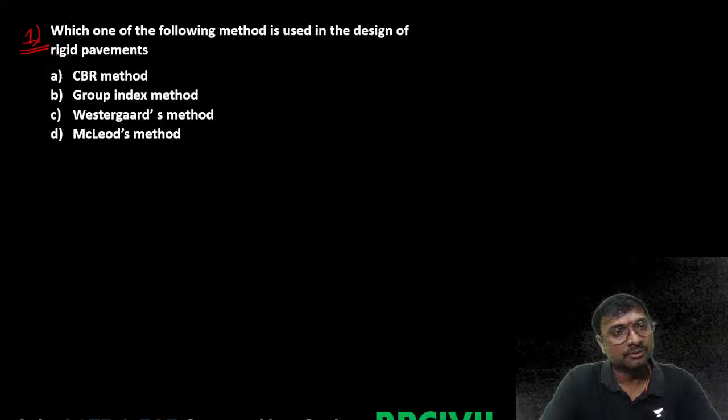Transportation engineering part 1. Select the answer for this, everyone. First question, write your answer. I did not give the timer actually — timer should be incorporated. Okay, let it be, from tomorrow's class onwards I will be incorporating the timer, don't worry. But here, what you do, you just write your answer, everyone.

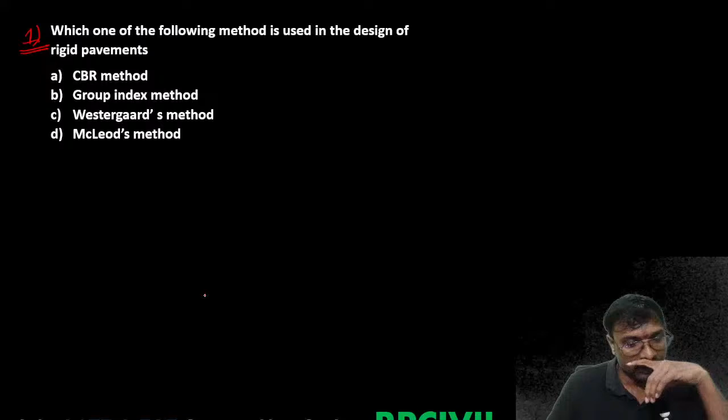Write your answer, everyone. Anyone? Yeah, Jagrati, good morning. Any answer by anyone for this? Somebody?

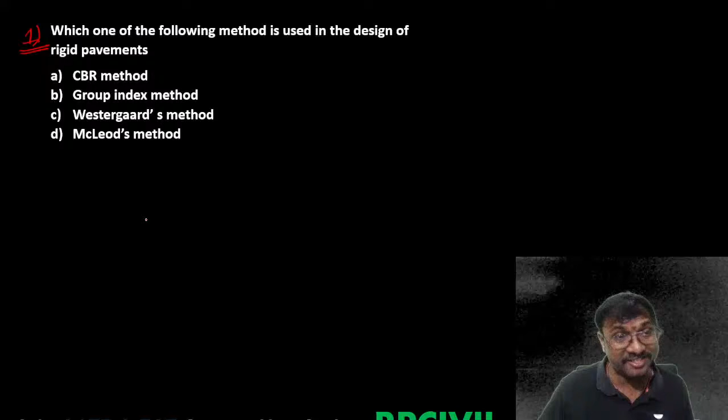Jagrati said B - group index method. Rigid pavements, you have to be careful. So which of the following methods is useful in the design of which one - this is a rigid pavement, right, used in the design of rigid pavement? So which method? CBR method is useful for the design of flexible pavement. Group index is also for the design of flexible pavement.

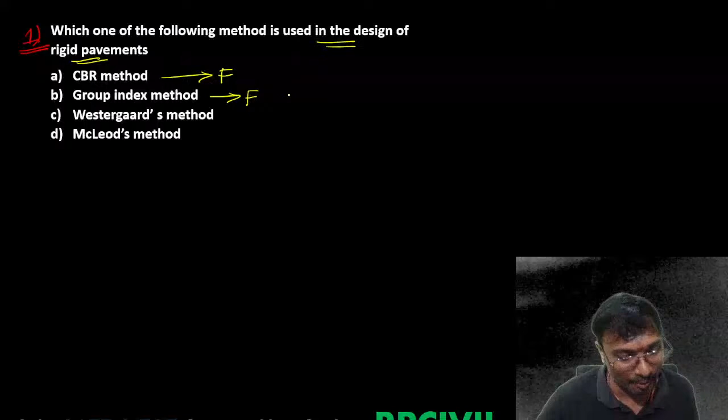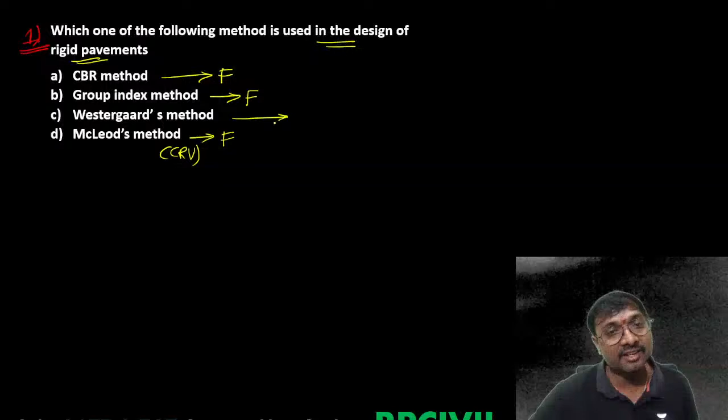Yeah, Abjal, very good morning. Option D, we'll check it. McLeod method, or this is CRV method - California resistance value method - this is also that flexible pavement method. Westergaard's method is only that rigid pavement method, yes or no? Westergaard's equations will be there, do you remember that? Westergaard's equations, Westergaard's coefficients, right, yes or no?

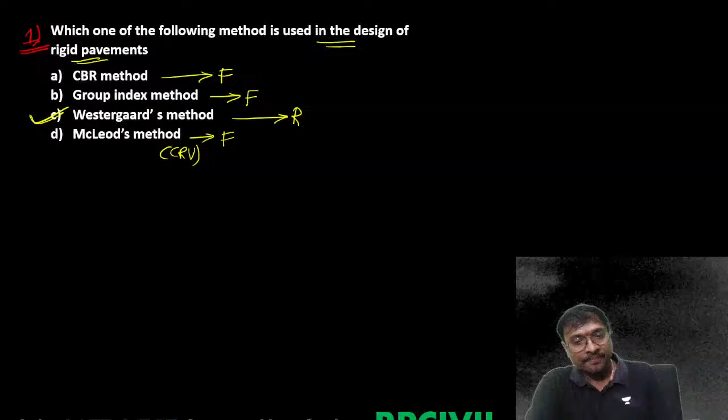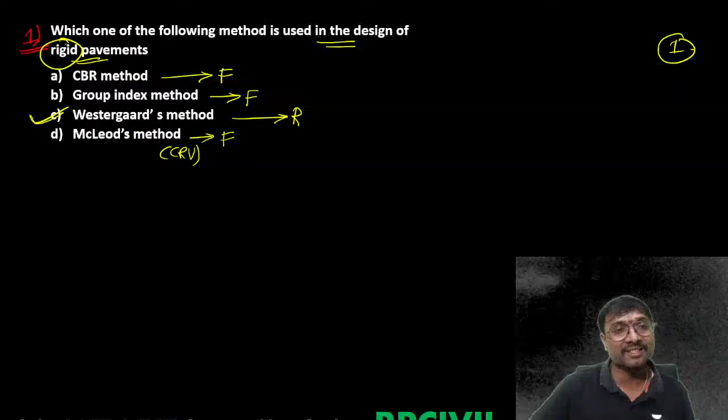See, Westergaard's equations, have you studied them or not? Yes or no, do you remember everyone? Load stress at the corner, interior, and all these portions - these Westergaard stresses, have you studied them or not? IRC stresses are modified, so which one is correct? For the rigid pavement, it is Westergaard's only correct now - for rigid pavement, Westergaard is only correct, you can say. Clear? Now select the answer, write the answer for the second question.

Write the question number and write the answer, because there is a delay or a little lag will be there. So write the question number and answer. Okay.

C, Hamid and Afjal said C. Any other answer by others? Jagriti also said C.

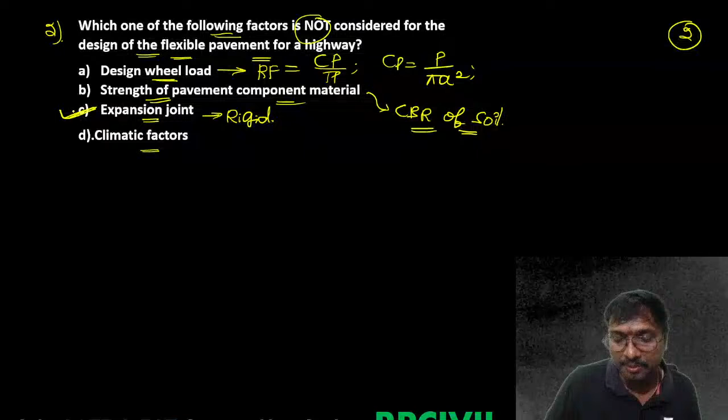Is that clear, everyone? Got it? Shall I move on to the next question?

So this is your question number 3, you can say, right? Question number 3, try to answer all of you.

Solve this, anyone? Anybody?

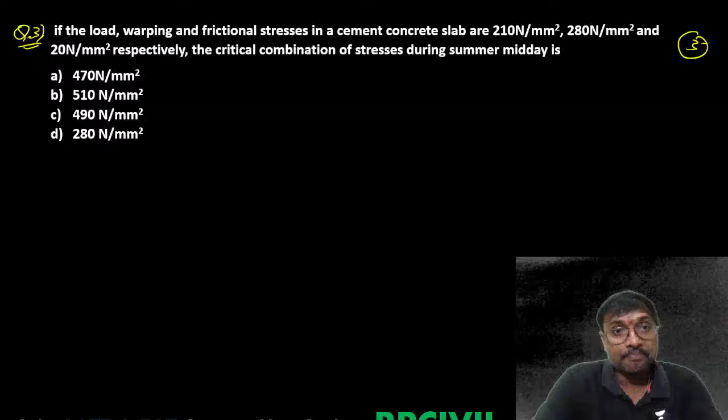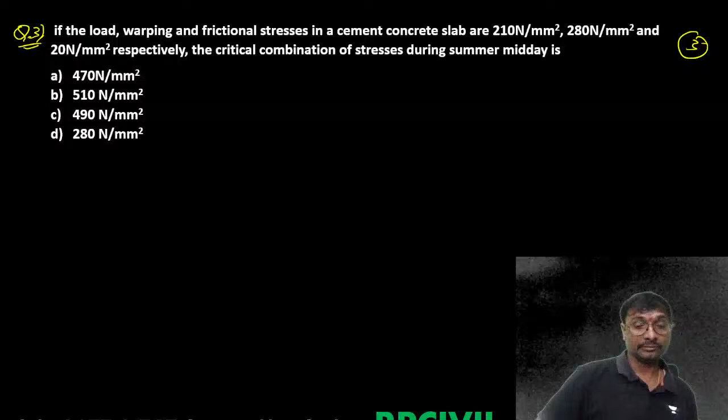Write the question number and answer so that I will not be confused about which question you are answering. Yes, na?

I should have given a timer, okay, but I could not incorporate the timer. I forgot actually.

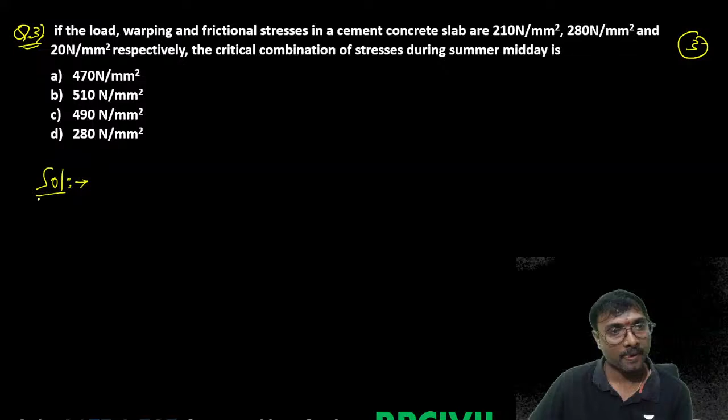Jagrathi answered yeah. Any other answer by others? Others also try and give. Amit said C. Next, anyone? Afjal, Alok. What is your answer? What are your answers?

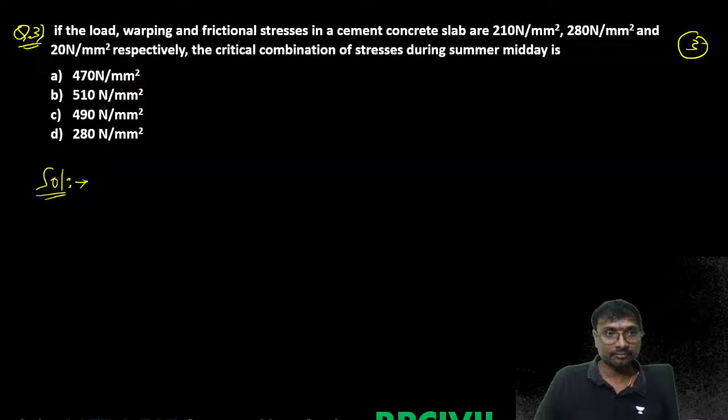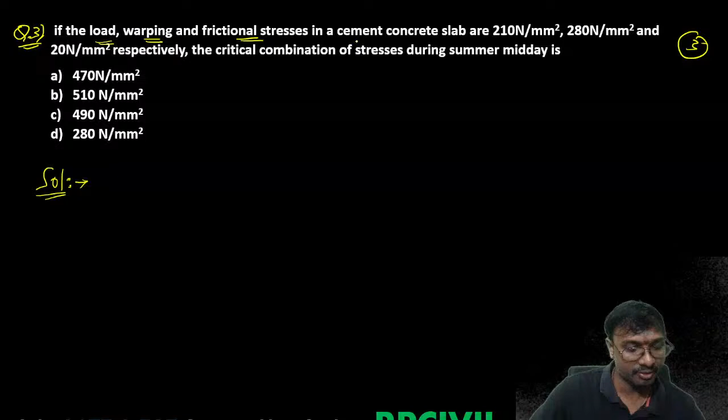Shall I go for this? So if the load, warping and frictional stresses, yeah, Afzal also said C. Alok, what is your answer? Okay, we'll see. Frictional stresses in a cement concrete slab are 210 MPa, 280 MPa and 20 MPa respectively, right?

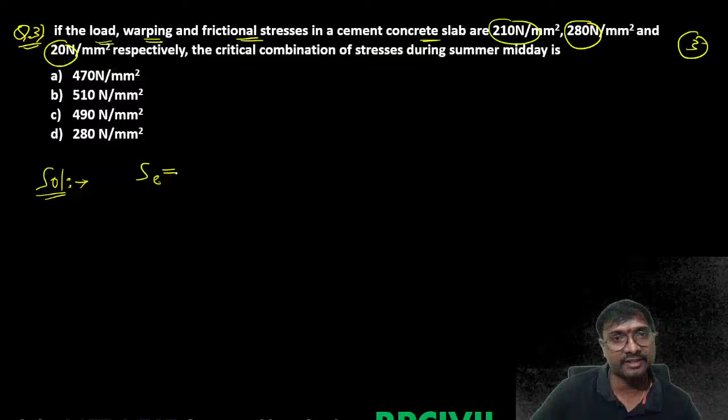What is it you can say here? Wheel load stress, right? Yes, it will be given as which one? Here the edge, let us say, right? It is not given, so the combination is summer midday, na? So whenever it is summer midday means interior or edge, both will be same, na? So here edge SE is given as 210 MPa wheel load stress.

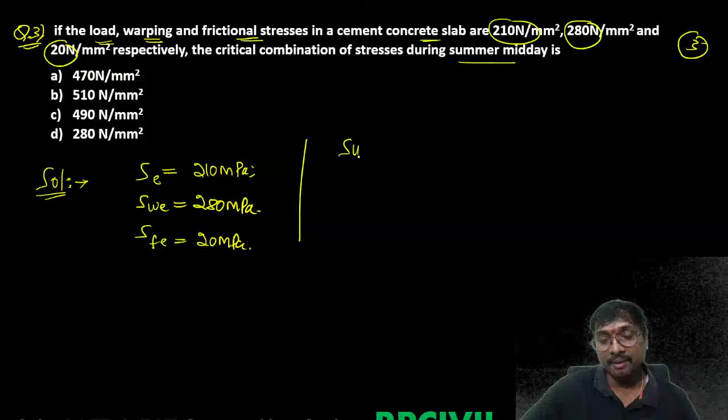And what is the warping stress? SWE is given as 280 MPa, na? And what is that you can say? If you just observe it, frictional stress, na, SFE is given as 20 MPa.

Now so whenever it is summer midday conditions, at this edge location or is it also applicable for interior location? For both the locations, it will be same formula only, na? Isn't it? Summer plus midday conditions, right? Whenever it is summer plus midday condition, what is the resultant stress at the edge? Wheel load stress is positive, right? Why? Because at the bottom only we are having, na?

At the bottom only we are having, right? Whenever your wheel load is acting at the edge, it will be behaving like simply supported beam or not? Simply supported beam or simply supported slab behavior. So whenever it is a simply supported slab or beam behavior, what is it you can say? Top compression, bottom tension. We are interested in bottom only. We have to calculate it bottom only. So wheel load stress is positive, right?

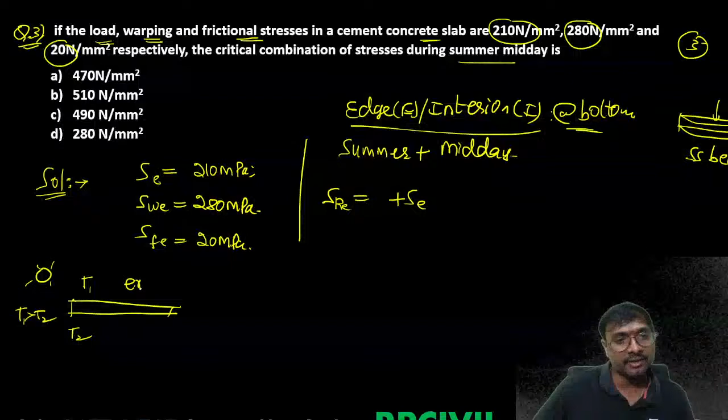Daytime. So whenever it is daytime, what happens? You can say top has higher temperature, na, top T1 temperature will be higher than T2. So top what will happen? Expansion will occur. So bottom what will happen? Contraction will occur, right? To resist this contraction, what is it you can say? Tensile stresses will be created, na? Top, to resist that expansion, compressive stresses will be resisted. We are interested in the bottom. Bottom contraction will be resisted by tensile warping stresses. So warping stress is also positive, right?

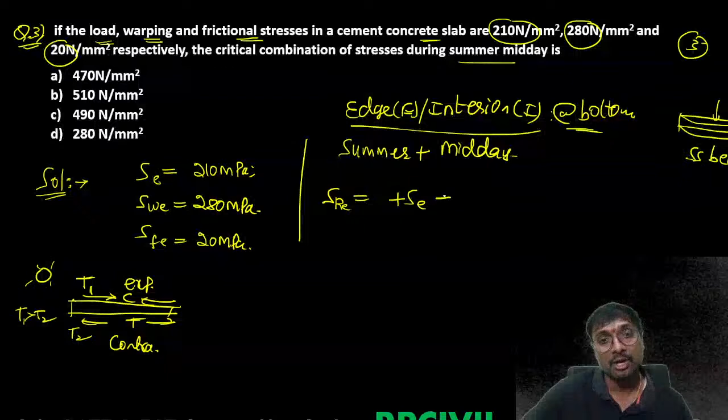Plus SWE, right? So now summer, whenever it is summer means high temperature at the top and bottom, na?

High temperature at the top and bottom means top and bottom expansion will be there. That top and bottom expansion will be resisted by which one? This is top and bottom compression or not? So top and bottom compression, you can say, right? So compression means minus SWF, right? Is it clear everyone? This is how the sign comes.

Wheel load stress, warping stress and frictional stress, right? Is it clear everyone how these signs come? So SE is what? 210 plus this SWE, how much? 280 minus 20, you can say, right? What is the resultant stress at this edge portion you are having? How much MPa you are getting? MPa or Newton per millimeter square, both will be same. How much you are getting? Check it and tell me, all of you.

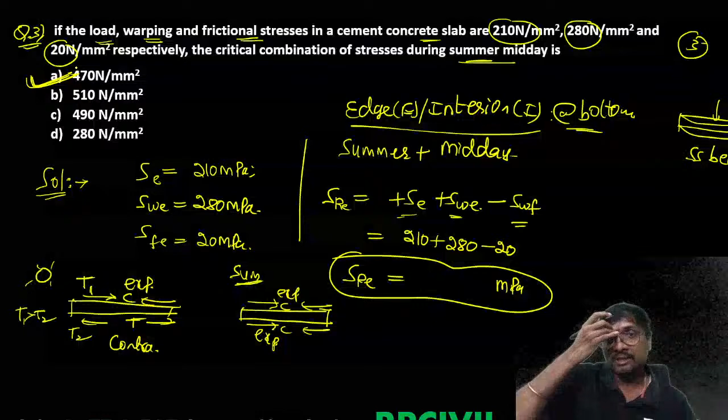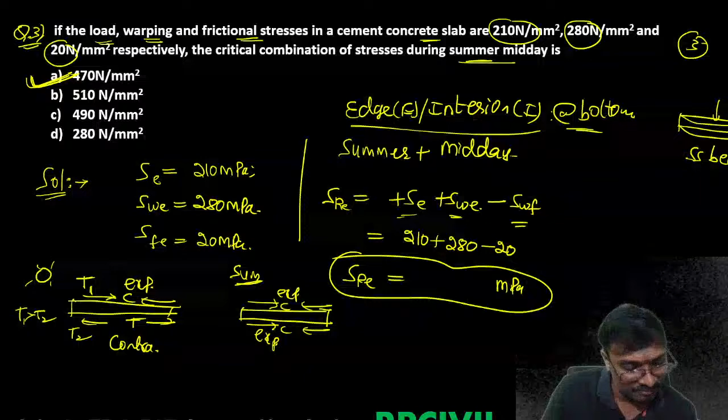470 you are getting, right? Is that clear everyone? Those who answered wrongly, where did you make the mistake? Simply you might have added 210 plus 280 plus 20, that will be giving 510 actually, right? Understood where you made the mistake, all of you? Right. Okay. So shall I move on to the next question?

I'll be moving on to the next question, and that is your fourth question. So write your answer everyone. Add the question number and write your answer. Fourth question.

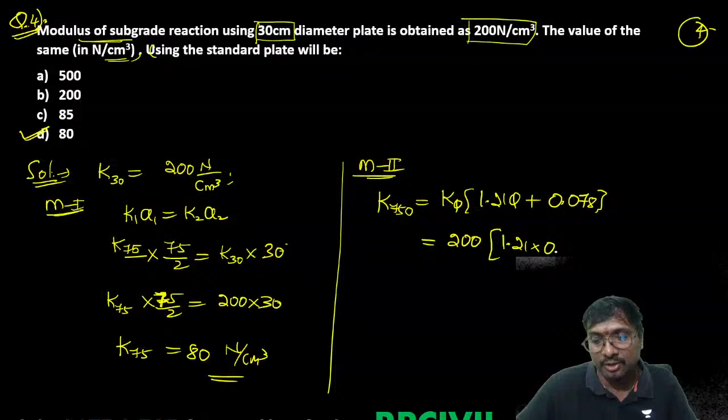K75 will be equal to K30 into 1.21 times a plus 0.078. K30 is nothing but your 200, right? K corresponding to this diameter, and a will be in meters. So 30 centimeters means 0.3 meters, plus 0.078. So this comes to be how many Newton per centimeter cube, everyone? How much does it come to approximately? This value 1.21 into 0.3, what is that value?

363. 0.363 plus which one? 0.363 plus 0.078, right? How much does it come to be? 88.2 you are getting. Okay, 8, 9, 10, 11. Okay, 7, 8, 9, 10, 11, 12, 13, 14. Right, 4. So 0.44, right?

So 200 into which one? This is 0.441, right? So what is that if you multiply with the 2 now? So 882, so 2 zeros if you want to shift it, right? 882, these 2 zeros, and finally it will become 88.2, right? So is there any option with that? There is no option with 88.2, right?

So which one do we have to select now? The old method one or the new method one? Tell me. Which one is better to select? This old method one, 80 Newton per centimeter cube, is there; do we have to select that or not? Yes, absolutely.

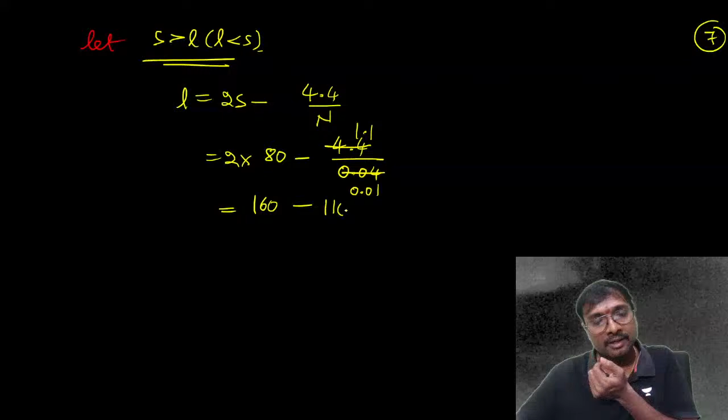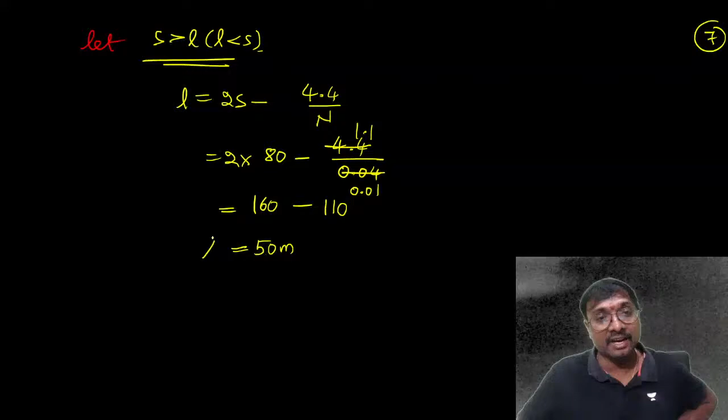110, na. So 160 minus this 110 will be how much? 50 you are getting, right? 160 minus 110 will be 50 meters, right? Is there any answer in the options, or there is no answer in the options you are having? If you just observe.

Write the answer for this question, everyone. Question number 7. Solve this, everyone.

All of you done your breakfast? Jagrati said D. Any other answer by others? Hello. Someone? No other answer? Are here? Nobody? Why? You know this or not? Alok D. Any other answer by anyone else? If any one more person answers, then I'll try to solve this. Okay. One more answer. Yeah, Raj Sharma answered D. Okay, I'll solve this now.

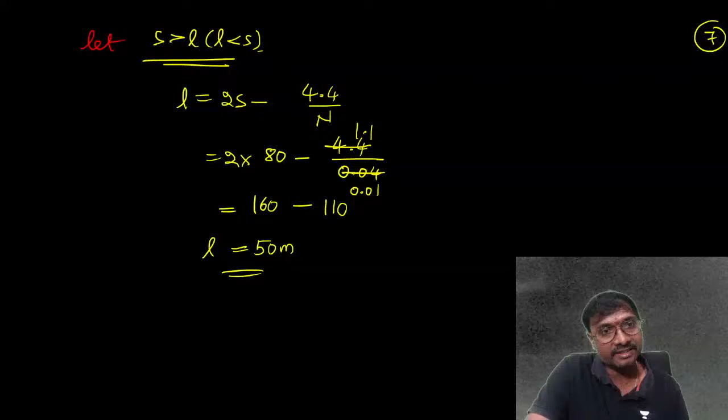So whatever value calculated here comes to be wrong. This 58.18 comes to be wrong. So that's why we went for the second case: S greater than L. Sight distance is higher than the length, right? From this we have got 50 meters, so no answer is there. Okay, got it now, Rekha? Okay, select the answer for this.

Someone, Jagrati said C. Maths Ovation also said C. Any other answer by others? One more answer. Yeah, Alok also said C.

A runway is located at 450 meters above the mean sea level. So that X will be equal to that 450 meters or not? Yes. If the aeroplane reference field is 1800 meters, what is the meaning of this aeroplane reference field? That is your basic runway length. Basic runway length will be 1800 meters, right?

What is the approximate corrected runway length for elevation? This is actually a previous ESE question only. For every 300 meter elevation, we have to go for a 7% increment in this basic runway length. And here it is 450 meters. How much percentage increment? So 450 means you can write it as 300 plus 150.

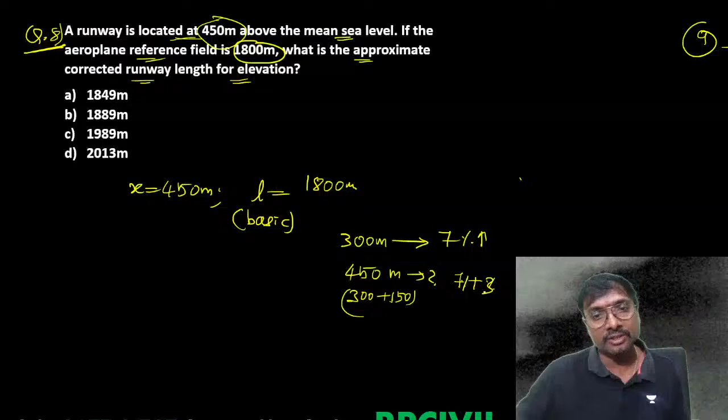So for 300 already 7%, plus for 150, half of the 7%, so 3.5%. So that is your 10.5% or not? Yes, absolutely right. Therefore, what is the corrected length L1? 1.105 times this L. So 1.105 times this 1800.

If I shift these two zeros, 110.5 into 18. You can write 18 as 20 minus 2, so now it will be easy. So this is 1105 with a zero, 2210, minus 110.5 into 2. So 2210 minus 221. What is 2210 minus 221?

Because 110 two times is 220, 0.5 two times is 1. How much is 2210 minus 221? 10 minus 1 will be 9, then 10 minus 2 will be 8, and then 11 minus 2, which is 9. So 1989 will be there, right?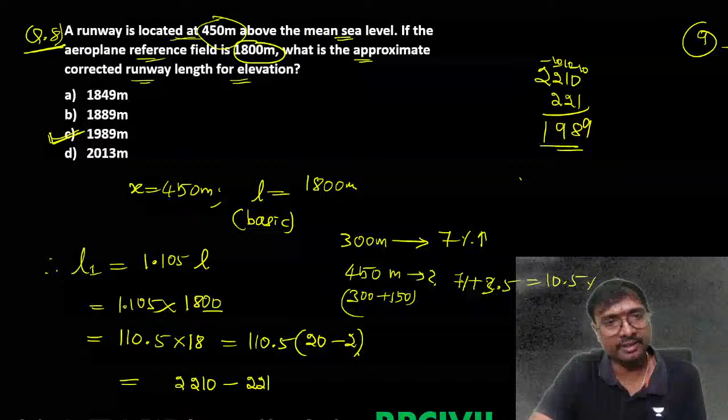Somebody write your answer for question number 9. Direct 1989 coming. Okay. Yeah, you can do it in any manner, right? Both the ways are okay. So whichever calculation method you feel comfortable with and faster, you do it.

Jagriti said B. Any other answer by others? Anyone answer this question? Only Jagriti answered. No answer. Okay, don't worry, I'll explain. Alok said D. Maths Solution said D. I'll explain it, don't worry.

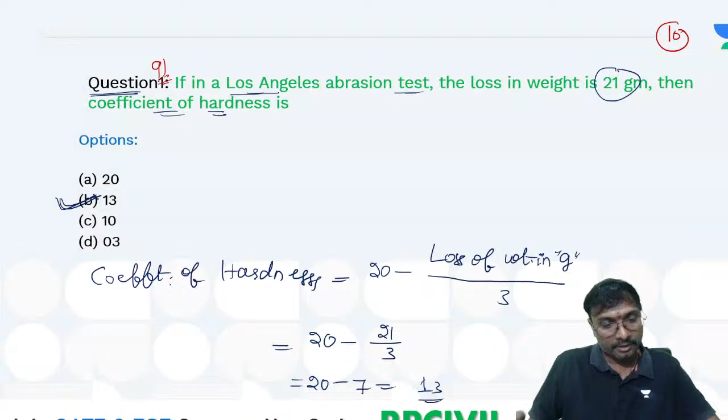Now, so test के बारे में, oops, object oriented programming. Is it so? Right.

So in our BTech we had this subject, object oriented programming, OOPS. That subject was there in our first year. So this is your drum, right? In this drum, what do we have to go for?

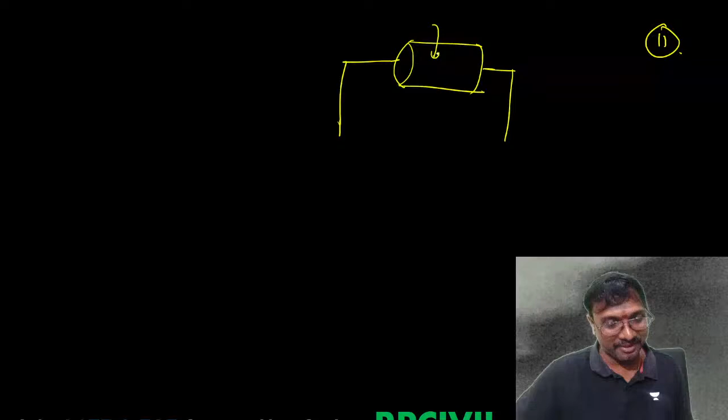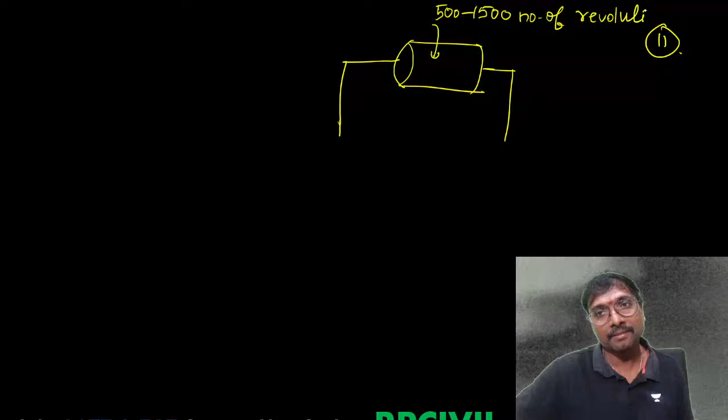500 to 1500 number of revolutions we have to go for. So the weight, how much weight of sample do we have to take? 5 kg to 15 kg sample we have to take.

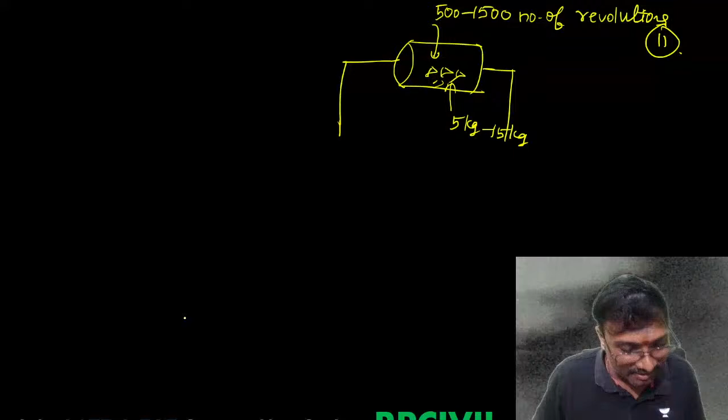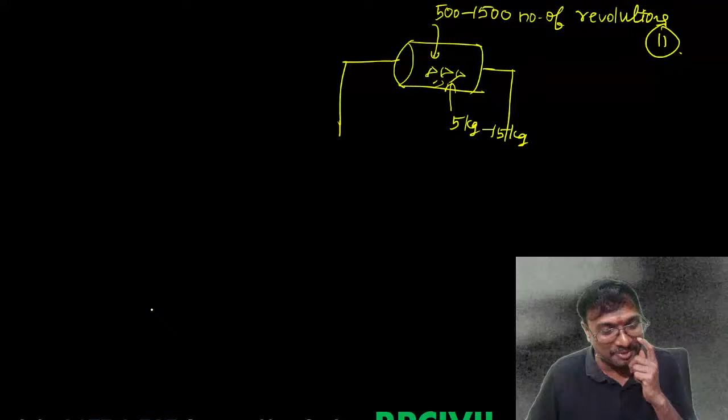If you just observe next... that's why, oops, okay yeah I know. I'm just saying, whenever you said oops, that OOPS subject came into my mind, which we studied in our first year BTech.

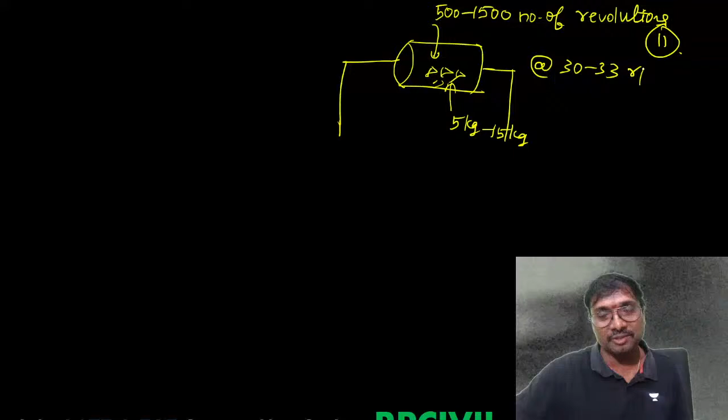So here 5 to 15 kg, and this is the number of revolutions. What is the speed at which we apply, 30 to 33 rotations per minute we have to apply. Now, Los Angeles Abrasion value.

After this is done, you take the sample and sieve it through a 1.7 mm sieve. Previously, in the impact test and crushing test, you pass through a 2.36 mm sieve, but here we have to pass through this 1.7 mm sieve.

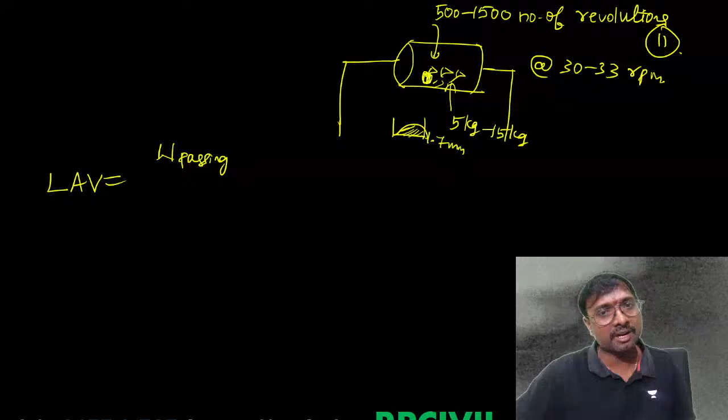Los Angeles Abrasion value is nothing but weight passing, where steel balls will be used. The number of steel balls and number of revolutions is decided based on grain size distribution. There is a very big table, but we are not going to cover the table. It will be decided based on that.

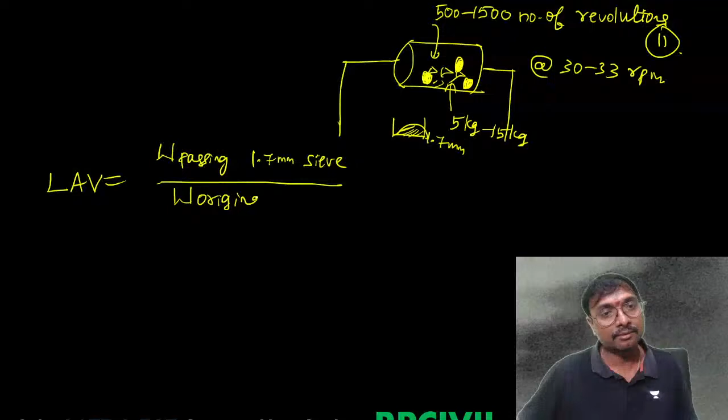So weight passing this 1.7 mm sieve, it is not 2.36, you have to be careful. Weight passing this 1.7 mm sieve divided by the original weight, taken into 100. So it is better we should have... it should not be a higher value.

Whatever it is, there are different values, 16% and all those things. So this is your Los Angeles Abrasion value. If that Los Angeles Abrasion value is more, what does it indicate?

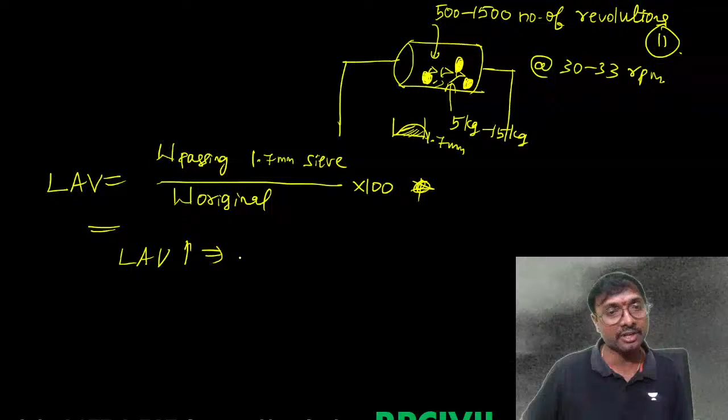That is hardness. You can say resistance against rubbing. Hardness will be lesser if the value is higher. So this is a measure of which property? Yes, it is a measure of hardness.

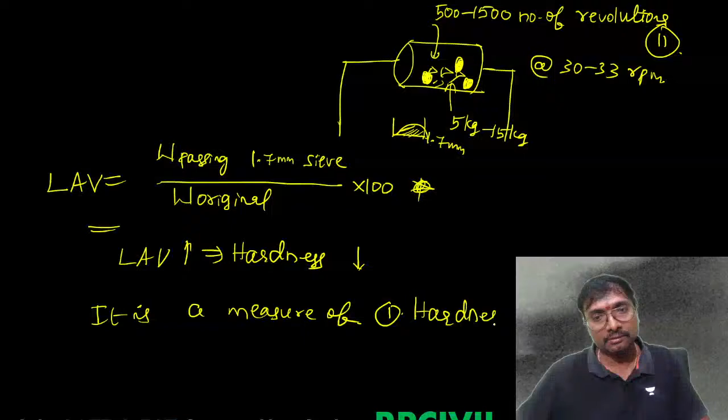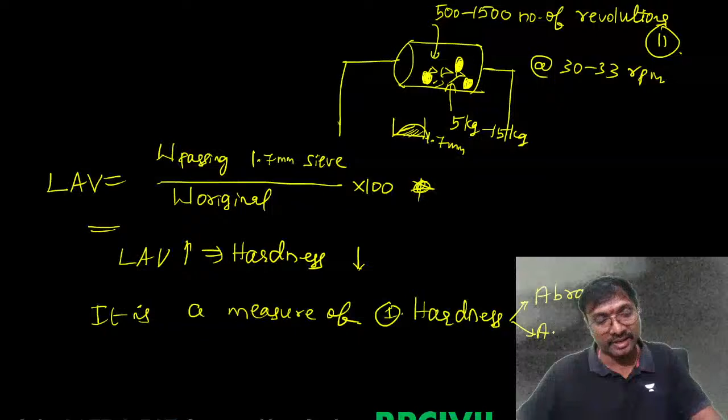Next, attrition. What is attrition? Attrition is nothing but rubbing action between particles of the same nature. Rubbing action between particles of different nature is abrasion.

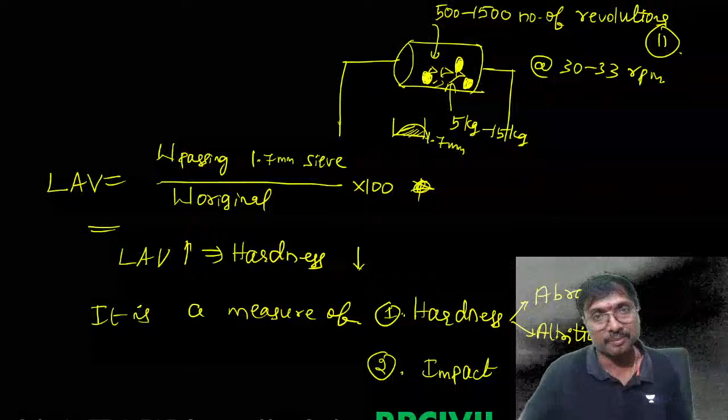It also measures impact conditions. Why does impact come into picture? Because whenever this drum is rotating, the ball from one location will go along with the drum and fall suddenly onto the aggregates. So these aggregates are also subjected to impact loading.

So it is better, these are all the properties measured by this test. Anyone having any doubts, all of you anywhere? Anyone having doubts? So I'll be closing the session.